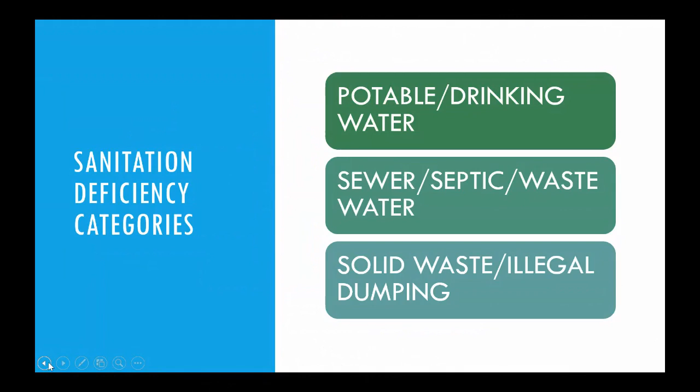So the Sanitation Facilities Construction Program within IHS has eligibility requirements for projects to be funded off the list. One of those is that the SFC program exists to serve homes, tribal homes particularly. So one of the eligibility requirements is that the project has to address the deficiency at homes. Also, every project that potentially could be funded from the SDS list must address an identified deficiency and have a health impact. Those are the 2 basic eligibility requirements.

An eligible home for IHS SFC program is a home occupied by a tribal member as their primary residence year-round. It can be a community home, so we can have community projects, or it can be a scattered home where we just do individual corrections for that home. Sometimes we group them into a district-wide project, but it's still individual services for each identified home.

Ineligible beneficiaries can still benefit from a project, and those would be non-tribal homes, homes that are under management through a HUD-funded housing program, because HUD funding should cover corrections to deficiencies at those homes, and then any non-residential user or beneficiary to the project, which includes offices, government offices, tribal government offices, schools, medical facilities, businesses, and any other non-residential user. Those ineligible beneficiaries can still be part of a project, but at the end of the day, in the estimated cost estimate, they have to provide a contribution to cover their portion of the total cost estimate.

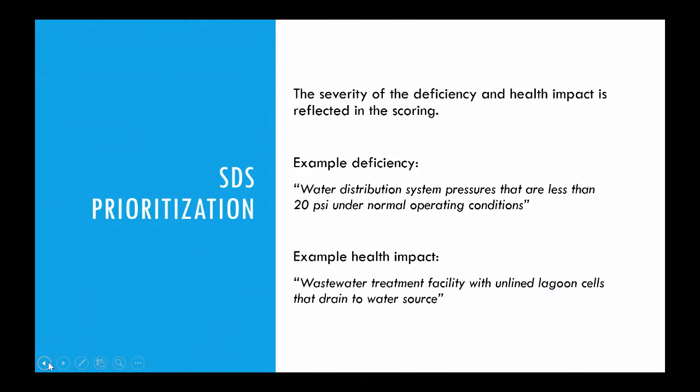I wanted to mention one other thing about SDS. There are other agencies that sometimes come to IHS and say, can we see your list? What do you have? We want to identify projects for funding. Currently, the EPA Clean Water Indian Set Aside Program just uses SDS to identify projects for funding. However, EPA Drinking Water Tribal Set Aside does not use SDS - they have their own application and their own timeline for applying for drinking water funds. They like to see it on SDS, but as far as I know, it's not a requirement.

And then the state has sometimes approached us and said, hey, what's your list got? Can we talk about maybe projects? And then we would still go to the tribe and ask, do you want to talk about state funding? But they could use SDS to identify projects.

So that's my quick summary of what SDS is and how it works. I have a couple of recommendations for anyone out there who wants to talk to their IHS project engineer about a project that might be eligible for SDS. Number one, as soon as you have a deficiency you think you want to put on SDS, start documenting it. Take photos, preferably time-stamped photos. Save work orders - if you don't have a work order system, start making one. And if you do purchase any services or materials to address a problem, save those invoices and keep them for your IHS project engineer.

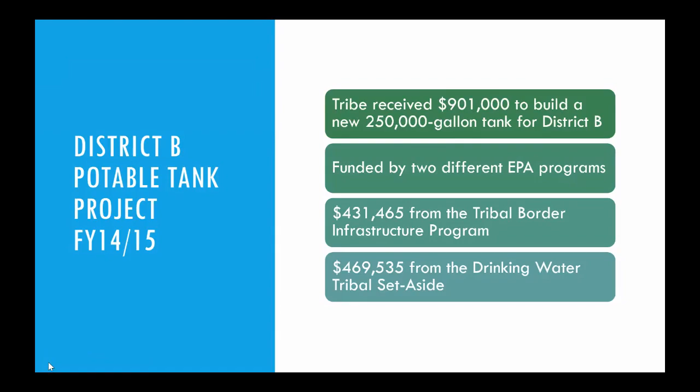The deficiency on this was basically, oh, sorry guys. The deficiency was we had an existing tank, you can see in the one picture here, this blue tank. It's a bolted 100,000 gallon tank. It was built in 1998.

In 1998, there were about 50 or so residential households coming off this tank. Fast forward to 2012, 2013, when we put this in for funding, there were about 130 residents, plus we were servicing all of our government center and a portion of the casino admin buildings.

So the deficiency was we definitely did not have enough water to adequately support our community and the growth of our community, because that was at the time. Since then, we're up to about 150 homes.

Also, the bolted tank—anyone that has a bolted tank knows the number one enemy to a bolted tank, or any tank in general, is rust. So this tank had a lot of rust, some issues with it, with leaks springing. So we got this funding and said, let's build a welded tank because you have less rust, less bolt failure in them.

So we were fortunate to get funding. We put it in SDS and then it got funded through EPA. They pulled it directly off, it scored really well, and we were fortunate to get funded.

Also on this project, there was an existing old 20,000 gallon little tank next to it. That was also somewhat of a deficiency because it was still technically connected to the system, just with a valve closed, so there was a concern of cross connection with the old tank. So part of this project was to destroy the old tank and remove it, then build a new tank in its place. The blue tank went offline as a potable tank, and we use it as an irrigation tank now.

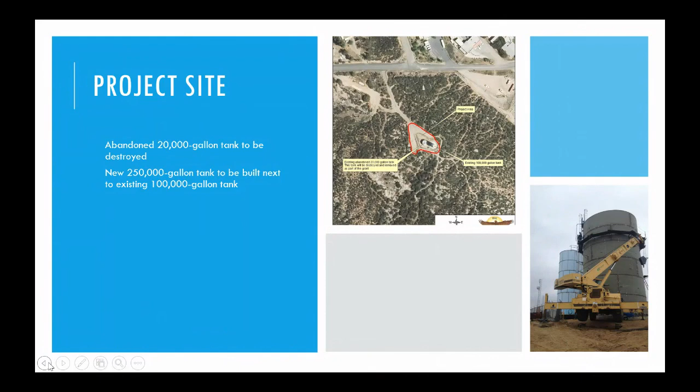So how do you build a tank? This is the District B tank project. It took us, after we got the funding and got into construction, about 6 to 8 months of construction.

Go ahead and hit play. This is how we built the tank. We compressed 8 months of construction into a 2-minute construction video right here that we did.

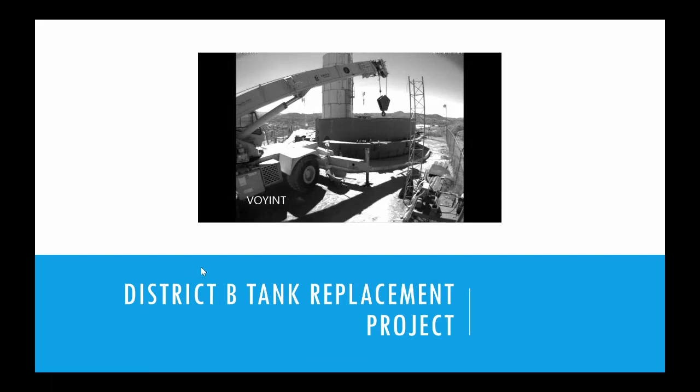Part of this I want to talk about is on some of these projects, we're also trying to build tribal capacity. So on some of these projects, we're using tribal labor through the IHS force accounts. Our crew tore down the old 20,000 gallon tank - it was pretty easy, we just got an excavator up there and knocked it down, then removed it, and did the over compaction. The company we hired did the concrete and everything else from there. We got paid from IHS on this, and the tribal government did about $25,000 to do some of this work. That was really good.

You'll see this on another project where we use our own water department to do a project that was funded through IHS as well, through SDS.

So this was a really nice tank. It's in operation, of course. Now it's 250,000 gallons, meets the current and future needs of the community. We dive it every 3 years - no rust issues, we've had no issues with this tank. It's a beautiful tank. Highly recommend it if you can get the funding to do a welded tank.

Please do so. As we know, IHS and EPA don't really fund O&M after a project's completed. O&M on a welded tank is very minimal compared to a bolted tank. Over the years, we've had to replace bolts and fix leaks in the bolted tank. We had to sandblast it recently because we still use it for irrigation water. But this tank will last a lot longer than your bolted tank will - it does cost a little bit more. Julie and I had another project in here, and we'll talk about a bolted tank and something that happened that we wish we'd had the money for earlier - we could have done something, but we made it work.

So that's the District B tank replacement project. I worked with IHS early on - we identified we wanted a new tank, we put it in, and we got the $900,000.

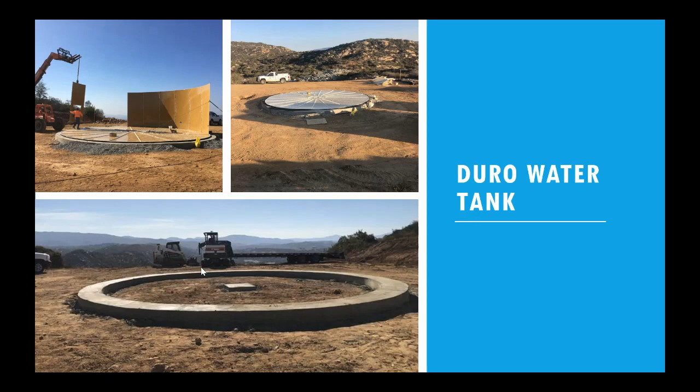So the new well does about 40 gallons per minute, though I think we're just going to run it at about 30. And our existing well does 10, so now we're at 40 gallons per minute. Eventually we will connect into Valley Center Municipal Water District as a backup on this one.

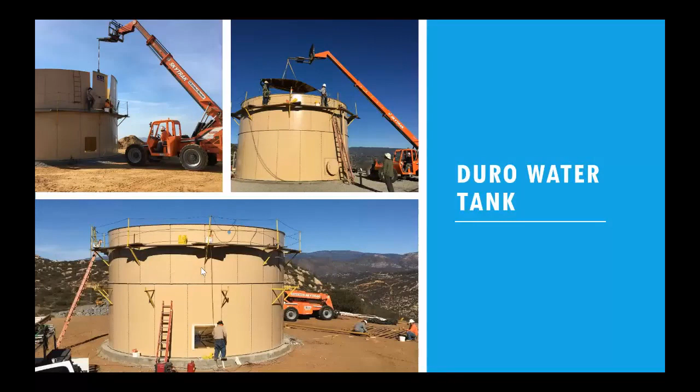This is the picture of the tank going up. So you can see this is a bolted tank. Really beautiful tank, does a great job. Beautiful view at the top of the mountain.

San Pasqual is 100% water metered. It used to take my guys 2 full days with 2 of my operators to go out and read every meter on the reservation, because we'd have to pop the meter box lids and actually read them and write them down. There were always errors because of human error—they'd transcribe numbers, flip a 6 and a 9 or reverse them. Then they'd have to go to finance and key them in manually.

And there were always errors, and it took a lot of time. So on one of our SDS projects, we had a little bit of extra funding because we came in under budget. We said, well, we have this money through SDS—can we do smart meter replacements? We worked with Indian Health Service and EPA, and they said, yeah, go for it.

One thing about meters that's nice is it lets you know if there's a leak going on in either the service line or the house itself. Why might that be important and a deficiency? Because if you go to the cross connection control stuff, that can potentially be water getting into a system that can then cause illness or sickness. It's a cross connection issue if you have a leak going on in your house.

It was also a financial issue for our residents, because if you're only reading the meters once a month and there is a leak going on, they don't know about it, and they're going to get hit with a very large water bill.

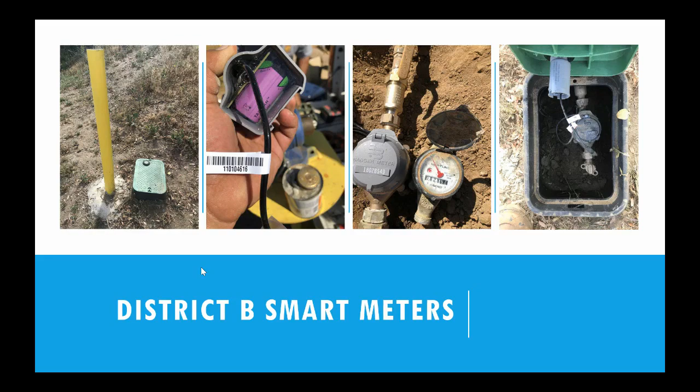We're not just getting funded through SDS for water and wastewater projects, but we were fortunate enough to get funded for a new transfer station that we're hoping to build by the end of this year. We do have an older transfer station that's outdated, built in the 90s. This one's going to be a completely enclosed Butler building, much larger. People are going to be able to drive through it and dump their trash in it.

Our older system, we put this in SDS a while ago - I put it in with Julie probably like 6 or 7 years ago. And she laughed and we laughed because we're like, this is never going to get funded, it's going to rank low, it's never going to get funded. But I said, just put it in, because you never know what the future holds. And lo and behold, IHS, EPA, all these agencies are flush with lots of money now because of the Inflation Reduction Act and the Infrastructure Act, and this got funded.

So what this proves is, put it on there. It's kind of like the old saying, you miss 100% of the shots you don't take. On SDS, I put everything in there - everything I want and the kitchen sink - because if it's not on SDS, it cannot be funded. But if it's on SDS, it may get funded.

And we've had projects too that ranked low, and then all of a sudden they had money for this one. Our smart meter project was ranked kind of low, but that year SDS had a bunch of money, and we used the funding to get that project up off the ground. So I would say put it in there. Even if you talk to your IHS local engineer and they say, well, I don't know if this is going to score very well, it doesn't matter. It's your system, and you put those on there. Don't let IHS - I love IHS, they work great - but don't let them dictate what you put on SDS.

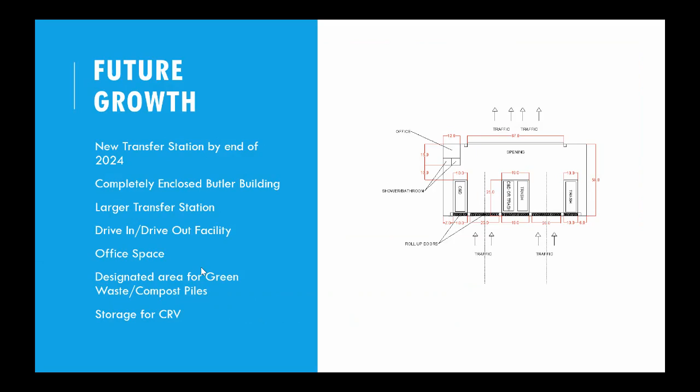So we talked about solid waste, now we talked about potable water. Let's talk a little bit about wastewater.

San Pasqual is one of the fastest growing reservations, I believe, in terms of new residents coming on in Southern California. IHS approached us and said, hey, we are getting all these applications for septic and sewer -- why don't we try to build a wastewater treatment plant instead of just scattered sites for septic? I said, that's a wonderful idea because I hate septic systems. Not that I hate them, it's just that everyone calls me when they have septic issues. So I have 400 individual wastewater treatment plants called septic systems, and that means that's 400 people calling me about a potential problem.

I said, let's just consolidate this down into one wastewater treatment plant -- we get so many applications, let's do this. So we put this in SDS, probably 8 years ago, and they said, this is never going to get funded. You know why? Because the price tag on this is $15 million, and we don't get $15 million probably in one year from Congress. And I said, keep it in there.

Let it ride, like I'm at the craps table, let it ride. So we let this thing ride for 8 years, thinking, oh, it's never going to get funded. But then what happens? A new administration comes in, all this money starts coming in. IHS is like, we got $18 million. I said, let's do it. Unfortunately, prices have gone up since we started this project, so I actually need $28 million, but that's okay -- I need 10 more, that's nothing, because I got USDA here, and that's going to give me the other 10.

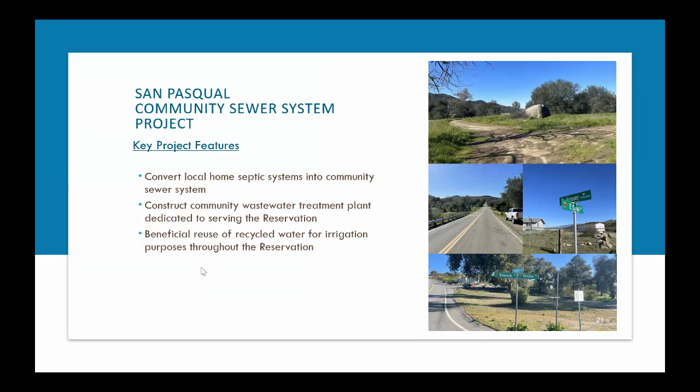So we got $18 million from IHS, and we said let's phase this project because it's a big project. So we're going to actually phase this. This is all the lift stations -- we're going to need about 3 lift stations. We're trying to use gravity as much as possible, gravity is your friend, so we're using it as much as possible, and we're connecting districts A, B, and C with the idea that we will phase it out over time.

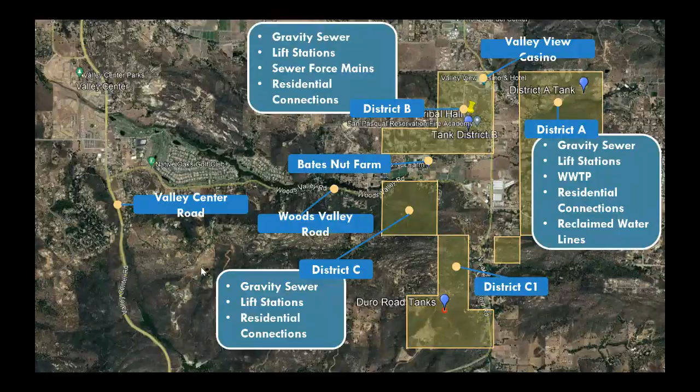So this is what the phased approach looks like. In the beginning, we will build our wastewater treatment plant right in the middle of this land that the tribe just brought into trust. Phase 1 will be this part of District A, the north part.

Then phase 2 will be the southern part of District A. Phase 3 will be District B, the north part of District B. Phase 4 will be the east to west portion of District B. And the last phase will be District C along Woods Valley.

So what does that allow us to do? It allows us to get the project going because we have $18 million. So the idea is we build the wastewater treatment plant, hopefully knock out District A and maybe parts of District B, and get them into the wastewater treatment plant.

And then we go out and find the rest of the money, because this is like a 5-year project. Now we've started this project. We've done the pre-construction engineering. We're still working on the engineering, but we hired Kimley-Horn, which did all this kind of work for us. Now we're doing the environmental and biological phase of it. We just started that with Kimley-Horn this month, with the idea that hopefully next year, around this time, we'll be able to put out phase 1 for RFP for construction and build the wastewater treatment plant.

And while we're doing this work, I'm calling EPA, USDA, Bureau of Reclamation to say, hey, do you want to pitch in on this project? Because success breeds success, and if you build it, they will come. So an agency wants to highlight, look, we did really well with our money and we already have this project started. So they're going to ride our coattails that we've done all this other work with IHS, and they're going to pitch in some money so they can put on their reports: look, we got this wastewater treatment plant funded for San Pasqual, and we worked with all these agencies.

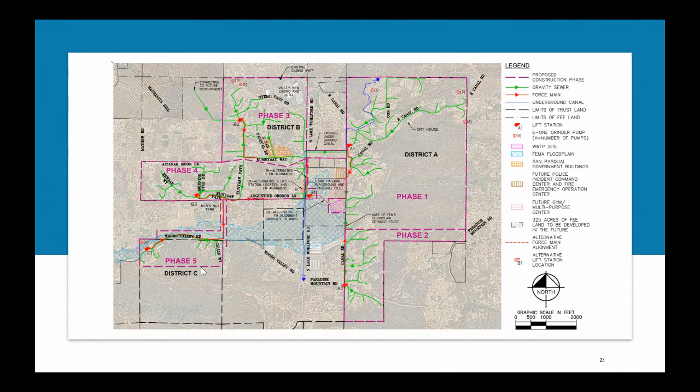And that's my presentation. So if you have any questions or comments for me and Julie.

On the wastewater system, in an environment where you have limited space for growth, I would imagine the wastewater system allows for denser development. Is the tribe considering that with this investment?

Yeah, so a little bit about San Pasqual, the way the tribe functions and works: each tribal member gets up to 5 acres of land, which was great 50 years ago. In those 50 years, they've had kids, grandkids, some have great-grandkids. Our topography is very rolling hills, so where the septic system sits and their leach lines are, or the reserve fields are, that now gets opened up for another home for that family. So what we're seeing right now with this project is it's going to allow a lot of infill growth on our assignments that we have. So now your grandson or granddaughter who wants to start a home and a family can build where we would have had the leach lines.

Or even then, if those leach lines, basically to make a septic system work, and Julie, correct me if I'm wrong, you need about at least a third of an acre for proper septic systems, right? But you could go smaller if you don't have to have septic systems.

So the idea is this will open up growth. This will also open up areas where maybe they're next to a creek, and we have to have an offset from a creek to make sure wastewater doesn't flow into it. So now you can build a house. Or we also have a ton of granite on our reservation, so we may have too much granite or too much clay, and we're not getting percolation where we want to build. Now that all goes away.